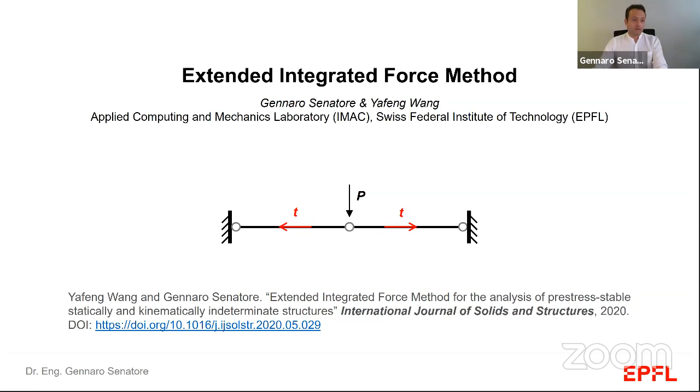Briefly, the existing integrated force method is based on equilibrium equations and compatibility through the self-stress states, which can be obtained by singular value decomposition of the equilibrium matrix. There is also this quantity we need to keep our attention on, which is the mechanism mode, the left null space.

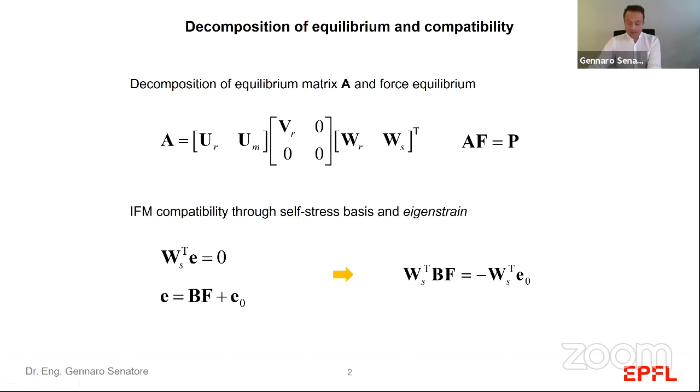What happens with these equations when the load lies in this space is there is no solution to the equilibrium equation. I think this example is effective: if the load is oriented in the vertical direction, and there is no pre-stress in these two members, then the classic equilibrium equations just break. So the total displacement cannot be uniquely determined solely through the element forces, and this happens when the load lies in the left null space of the equilibrium matrix.

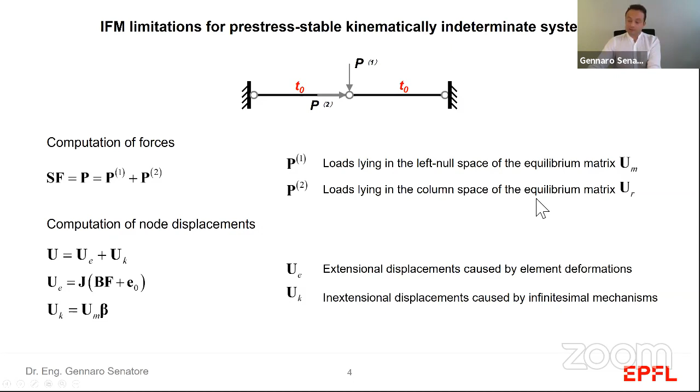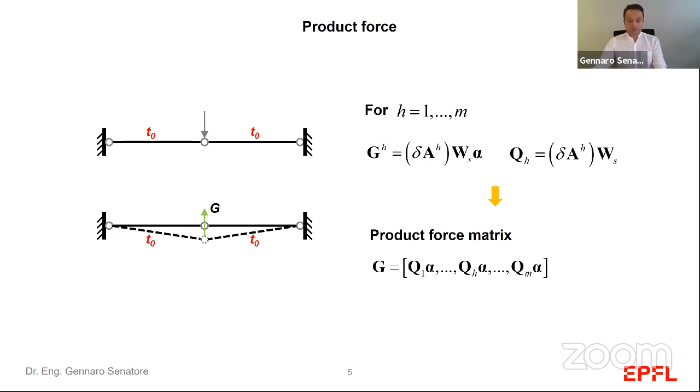So what we did is introduce the concept of product force, which was first introduced by Pellegrino and Calladine. The product force is basically the unbalanced force that arises as the mechanism is displaced due to the element pre-stress. As the elements reorient in space, because they are pre-stressed, even if there is a component of load that excites the mechanisms, due to the pre-stress and the reorientation of the elements, there is an unbalanced force that can actually equilibrate the mechanism.

So the product force can be used in a procedure that we propose, which aims at obtaining the appropriate pre-stress that can stabilize all the mechanisms in the system. This is done by making sure that this quantity, which is basically the product of the unbalanced forces times the mechanism modes, is always a positive definite entry, so this matrix is a positive definite matrix.

We solve this problem through semi-definite programming, which produces a global optimum through a primal dual interior point algorithm. The point to keep our attention on is that through this method, we obtain the pre-stress that guarantees that all mechanisms in the system have positive stiffness. That's the main concept: through pre-stress, we can stabilize the mechanism.

Once they're stabilized, then we can obtain a solution in terms of forces and displacement. Interestingly, we also include the so-called eigenstrain in the design variables. The eigenstrain can be thought of as the initial element deformation. So if you think of a structure, you need to change the length of the element such that a change of shape stabilizes the system.

We use this concept of eigenstrain in active control, where instead of modeling the imperfection, we model the change of length of actuators that are embedded in structures. So we use the same idea here.

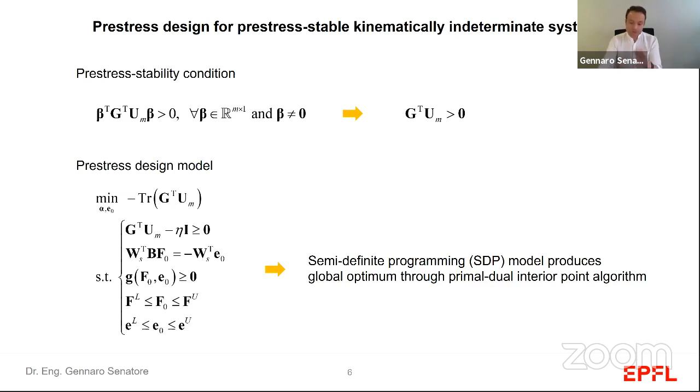Once the product force is obtained, it's relatively easy to extend the existing IFM equilibrium equation so that the primary unknown becomes the internal forces and the coefficient of the mechanism modes, whereby we can obtain the extensional part of the displacement caused by the load and the mechanism. The extensional part is simply obtained by using the orthogonality between the product force and the extensional displacement.

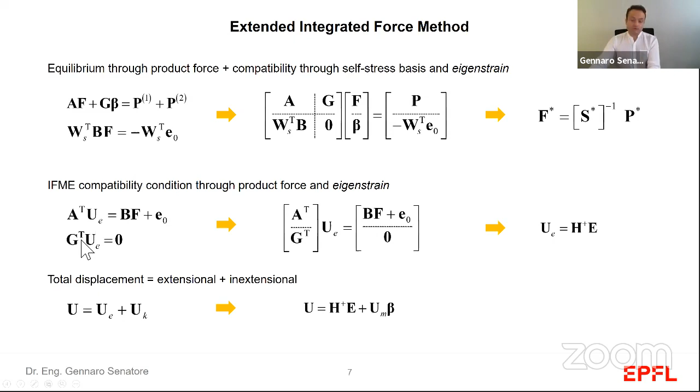This method is fully automated, so it is equivalent to the better known stiffness method. They're both polynomial third order, but our method, the IFME, gives a deeper insight because it also gives you the inextensional part of the mechanism.

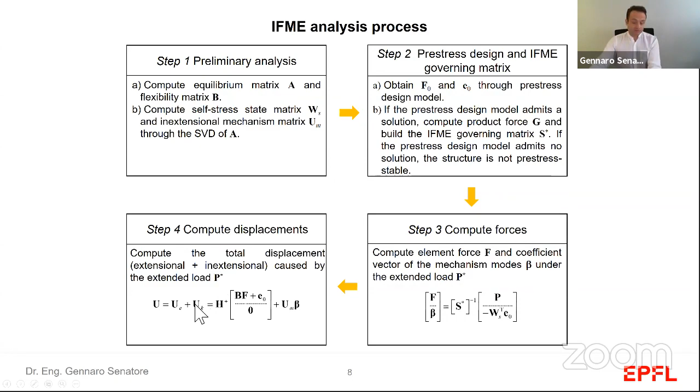Why you want to know that is because when you apply pre-stress, it can tell you how much stiffness you are imparting to the mechanism through the pre-stress. So it's an important quantity.

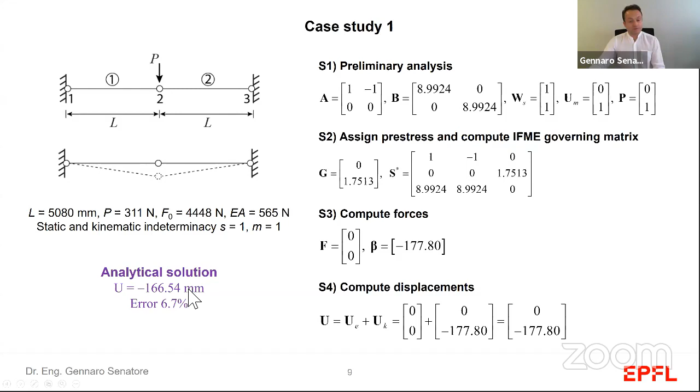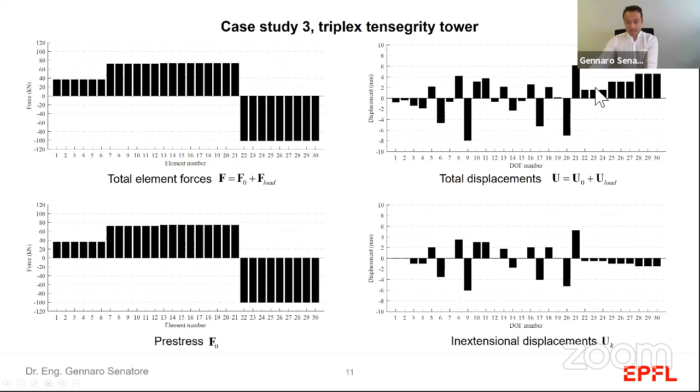Time is running out, but if I have one more minute, I'll show you two case studies. Good comparison with analytical solution. We overestimate the displacement, which is conservative, because we underestimate the stiffness of the mechanism due to the first order infinitesimal assumption. For more complex structures like this triplex tensegrity towers, it's interesting to see that we obtain the extensional and the inextensional part, which is even more obvious in this case.

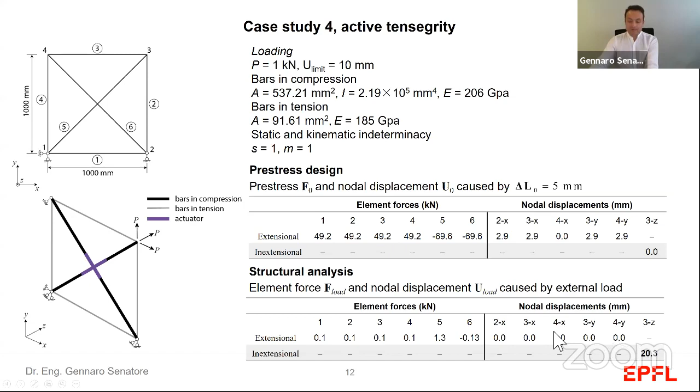We have a simple cross-bracing system with 2 actuators. In this case, the pre-stress is directly imparted through length change of the actuators. If a load is applied in the orthogonal plane and the out of plane determines a displacement of 20 millimeters, by applying a further change of length, then we can halve the inextensional displacement. So this shows you directly what effect further pre-stress has on the stabilization of the mechanisms.

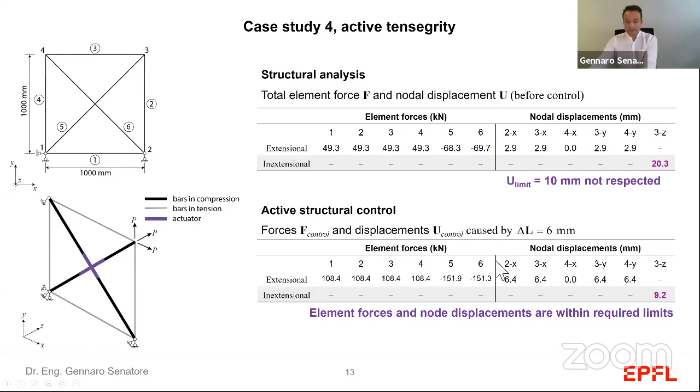And here we close with the conclusion, leaving it open to questions if there are any.

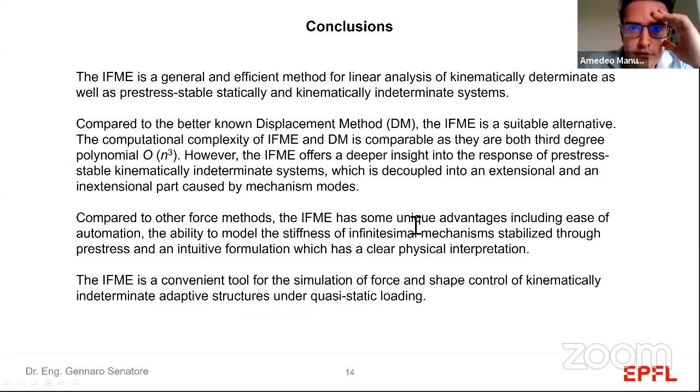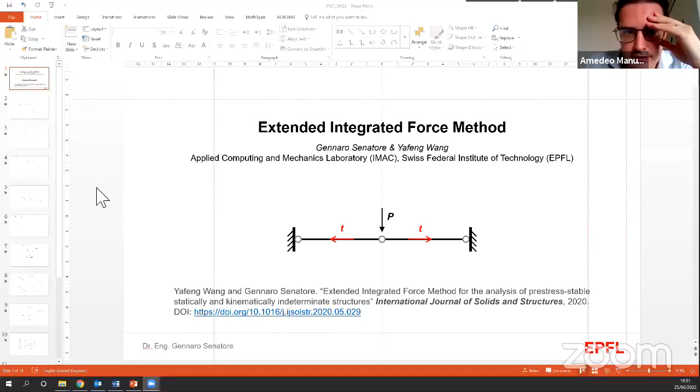Okay, Stefano, I have a question. Please, Stefano. Yes, here. Okay, sorry, I was muted, sorry. Thank you, Gennaro. It's really interesting.

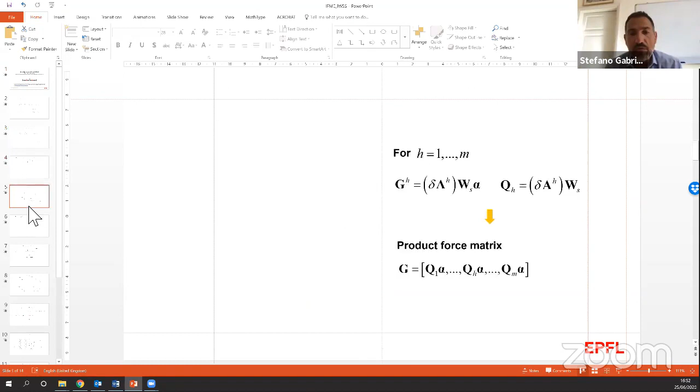So just a clarification about the matrix G. Is the matrix G dependent on the actual configuration? And how do you manage with this in the algorithm? And another question: did you try to compare some solution with some kind of approaches like Riks' approach or this kind of path-following algorithm?

Sure. So the first question about what G is. So G, you can think of it as kind of the stiffness of the mechanism in a way. The delta Lambda is the change of orientation of the elements, and then WS is the state of self-stress, and alpha is a coefficient. So this product, WS times alpha, is effectively the pre-stress. So there exist M product forces if there are M mechanisms in the structure. And the M mechanisms of the structure are given by the mechanism modes that you obtain from singular value decomposition. So this is a linear method, it's not non-linear, right.

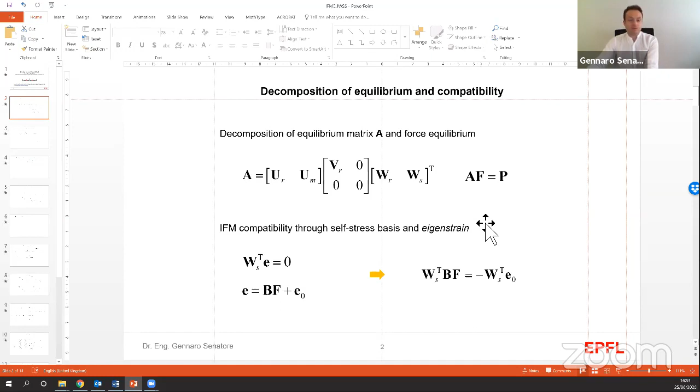It's a relative of what we call in other methods geometrical stiffness, similar to the geometric stiffness. That would be the equivalent if you use the stiffness method. If you use the stiffness method, you build the geometric stiffness matrix. But if you use the force method, we use the concept of the product force. So they are related, but they're not identical. You can show that the product force is in fact the projection on the mechanism space of the geometric stiffness matrix, but they're not identical.

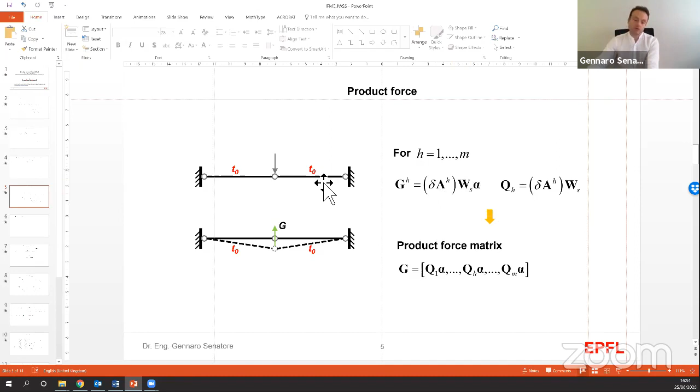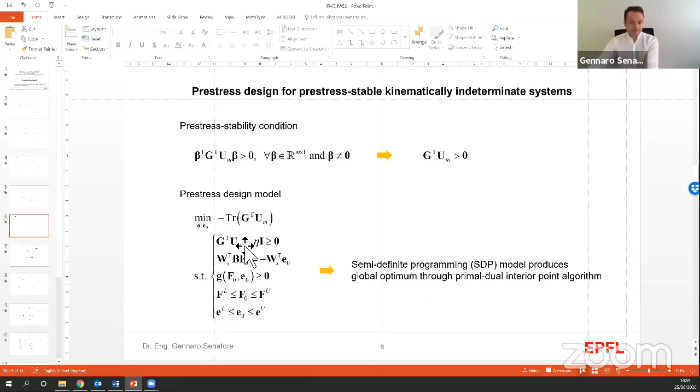So the important part is how to deal with it. If you ensure that this product is positive definite, then it means that you are applying a pre-stress that can stabilize all mechanisms in the system. And so you build the matrix G as a result of the solution of this semi-definite programming problem. Once G is obtained, this problem basically tells you also if the structure is pre-stress stable. So if there is a solution to this problem, because it is a global optimum, then it is a confirmation that the structure can be stabilized indeed through pre-stress, because not all kinematically indeterminate systems can be stabilized. But if there is a solution, it means that the structure is pre-stress stable. And so you can then continue with the augmented equilibrium and compatibility equations to obtain forces and displacement.

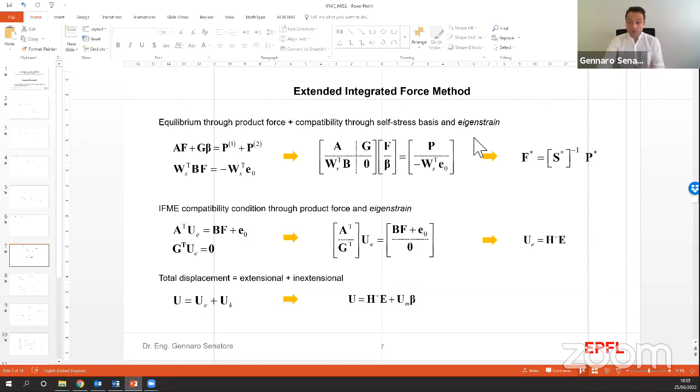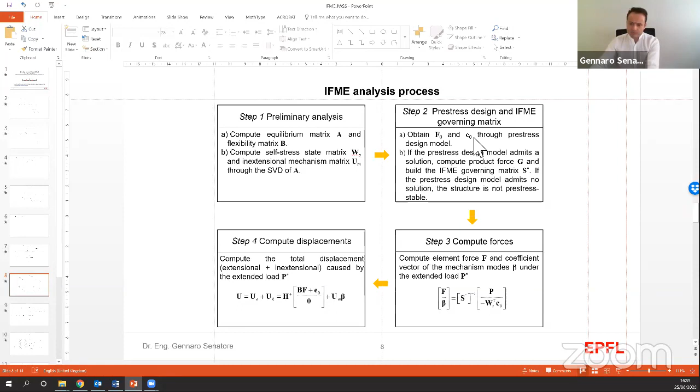Okay, thank you. The second question: we did not compare with nonlinear methods in general, but we did compare with a nonlinear method for some examples, and the answer, if I remember correctly, is pretty close. This work is published in the International Journal of Solids and Structures, so you can find that there. It was less than 10% different from the nonlinear method, but it is good to remember this is a linear method, it does not iterate through a configuration of equilibrium. It's a one-step procedure if you want to call it that way.